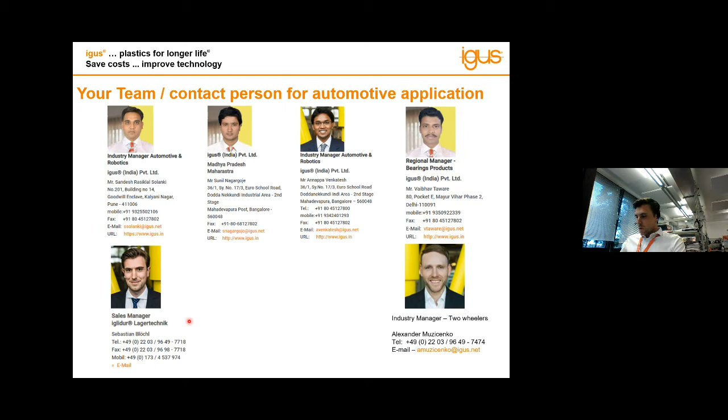So we can go into our agenda for today. We will start with some information about the company. What are we doing? What are our products? What kind of materials do we use? What is the secret behind the products?

Then Annappa will take over with the India presence. He will give you an overview about our production processes. He will tell you, and this is still very fascinating to me, we can provide so many different ways of samples. We can send even samples on the same day from the catalog, from the stock. We can machine samples. He will give you a lot more information about that.

And then we will go over to Alex. He will start with applications, cost down applications, technology improvement applications for the motorbikes, and Vaibhav will go over to especially applications for the scooter departments.

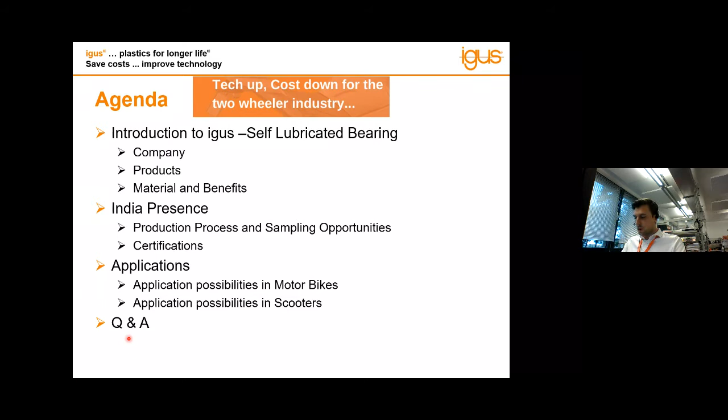Okay, coming back to the start. The company IGUS was established by this young fellow here, Mr. Günter Blase, together with his wife, Margret Blase. He started the business in his private garage, and he came up with the idea that he wanted to be the person improving solutions. He went to one of the biggest automotive suppliers, called Pierburg, and asked them directly: do you have any part you have issues with, some problems with? I want to solve it for you. They gave him this part directly. It was a metal part in the past, and they struggled with a short lifetime, and the part price was kind of high, so they had to replace it often, even with higher costs.

He invested in the first injection molding machine and engineered on it, and finally found a way to produce this part by injection molding out of engineering plastic. He reached exactly the topic from today, and still this is what we are following: improve the technology. He reached a much longer lifetime than the existing product, and on the other hand the part price, because of the injection molding process, was reduced.

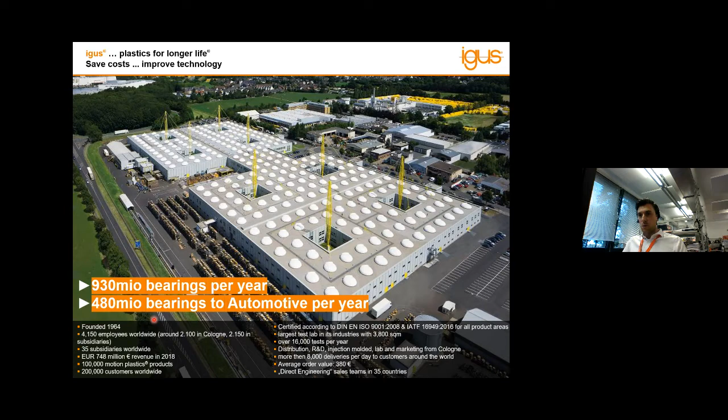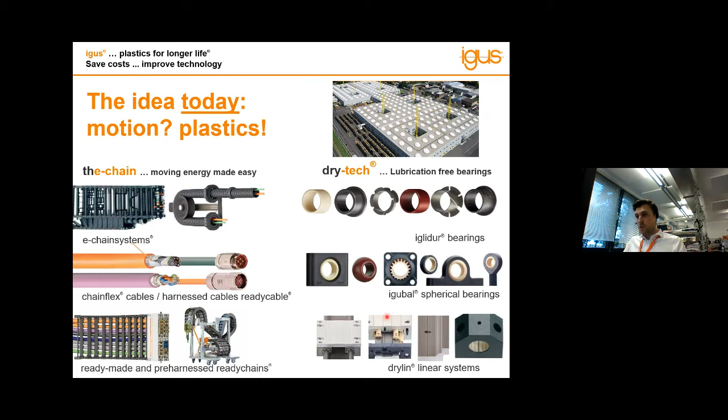Okay, let's go to the topic of material. Let's talk about our secret: what are we using? We are actually a material developing company. We call our materials tribopolymers. There's a reason for it: it's tribology, meaning we invest into material. We create materials which are being used in motions. This is what we do. We don't produce parts like laptop cases, screen cases, or box cases - we always focus on applications and products which are in motion. For that, we have to spend a lot of energy and effort into engineering new materials each year. We are creating around 500 new composite materials each year.

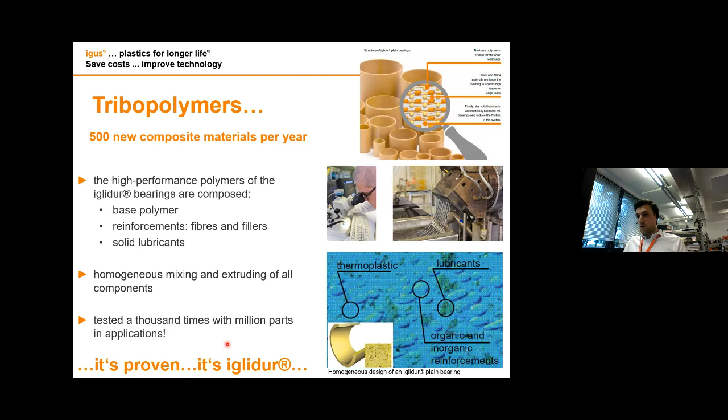Okay, already mentioned some benefits. So dry lubricants inside, that means we are lubrication free. You don't need any grease at all in your application. We are reaching very low wear rates, good coefficients of friction, to name these benefits. On the other hand, it's a plastic part, so we don't have any corrosion issues. You can use us in water contact related applications wherever you want.

We have a bunch of materials for pretty high loads, for very high shock loads, edge loads. Annappa will also give you information on why they are very good for edge loads. We will go over materials with up to over 250 degree temperature, so you are able to use them, and we are already selling millions of parts into gearbox areas, like over 250 degree constant temperature, possible with Iglidur, with engineered plastic from our side.

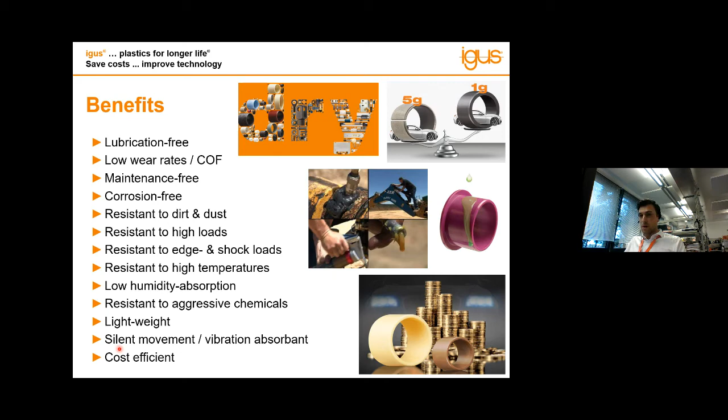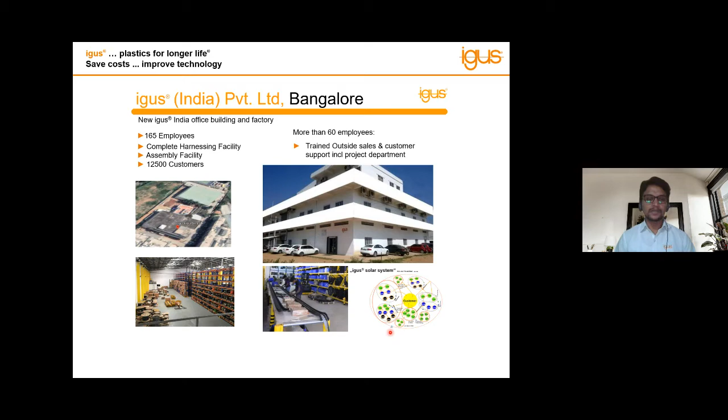So moving further, we will discuss the production processes or production technologies that we follow in the IGUS factory in Cologne. The first one, which is the core of our production process, is injection molding. When I'm speaking about injection molding, even the tool constructions happen in-house, so all our engineers work on the tool and we don't depend on any third party. Also all the materials required, as Sebastian explained, all the patented materials, different materials, are developed inside IGUS. The second process we are speaking about here is extrusion.

So in this extrusion, apart from standard catalog dimensions that are being injection molded, here we can produce round bar stocks and plates, which can be easily machinable. I will speak more about this in the next coming slides when we are speaking about the prototypes.

3D print technology, as everybody knows, is a new and evolving thing happening in the industry. We can definitely support you with 3D printed plastic molds or 3D printed aluminum molds, where we can bring down the setup cost that happens in injection molding. I'll cover this in detail in the next slides.

3D printing machines are also being used in our facility for sample support, like FDM, filament deposition, and SLS are also followed in IGUS facility. A few of the other, as I said earlier, semi-automatic assemblies and flexible assembly lines are being followed for cable management systems, and a few dry-lin systems also, like for automation, where we can assemble these things in the factory itself.

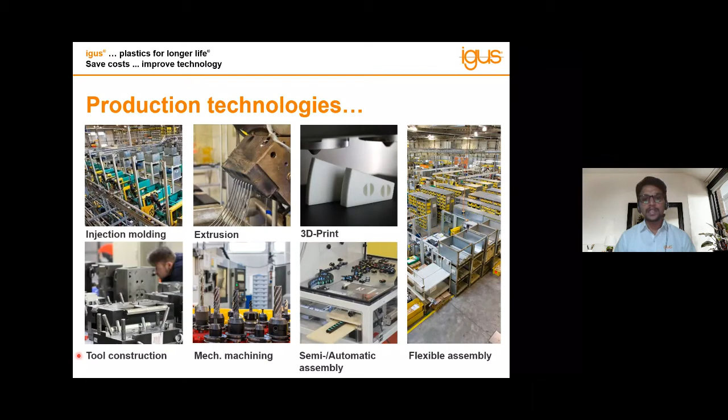So what are the various steps that we follow here? As I said earlier, injection molding is the main important production process that we follow. I'd like to bring in the point of catalog here, because we have close to more than 6,500 articles of one material in catalog. You can just imagine the huge dimensions available in our catalog in different materials and different sizes.

Just to give you an example, starting from sizes of ID of a plain bearing, starting from 1 ID up to 150 ID, and also with different thicknesses, different lengths, different collar lengths. This is one of the main USPs of the IGUS catalog, that you can directly choose the parts without even worrying about any kind of setup cost.

And in the second process, machining, if you are not finding that standard catalog part or dimension in our catalog, you can go for machining, where the round bar stocks that we extrude, or the plates, are easily machinable. We can supply you the complete finished part if you give us a drawing, or even the complete bar can be given to our customer so he can machine it himself. This is another step you can follow for prototyping.

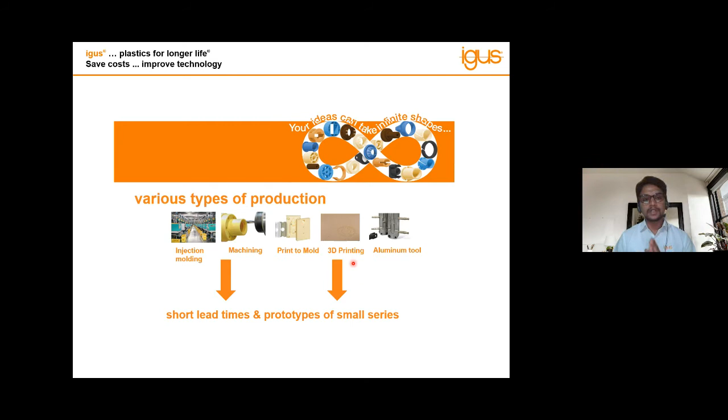For the fourth drawing, what you're seeing is 3D printing. As I said earlier, we also have 3D printing machines where we can give you immediate sample support with filament deposition, and we also have special materials like i3 which are extremely wear resistant, and we follow production processes like sintered SLS or sintered laser compacting process. These are a few of the prototype production processes we follow to support all our customers in their initial days of development.

So moving further, what can you replace with IGUS? You can see in the drawing, in the picture, you can replace bronze, you can replace bimetal, you can replace needle roller, PTFE coated backed metal bearings, bimetal bearings, and so on.

So what are the benefits? As Sebastian already explained, there are many USPs. The prime one being, you can see in the pictorial drawings, you can completely avoid rusting and corrosion. No lubrication is another USP, and weight, you can save weight by a ratio of 7 times when compared to metal bearing. And case by case, you can also save a cost of 40% when changing from conventional bearing to iglidur solutions.

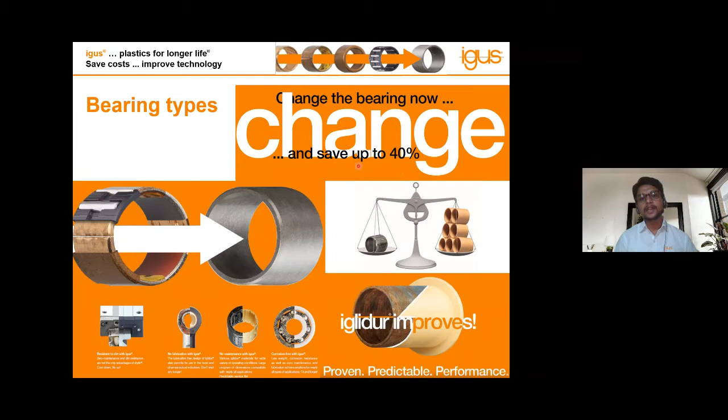Here I would like to do a quick case study with one of the very commonly used parts, which is PTFE or Teflon coated metal rolled bearing. You can see the composition of this PTFE metal bearing: a thin layer of around 50 micron of Teflon or PTFE, backed by bronze and steel, which are metal. In the next slide I will explain in detail what happens.

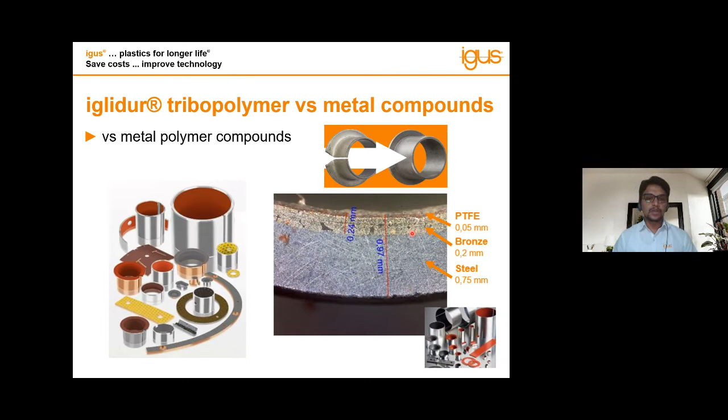Just to give a brief introduction, in the first picture what you're seeing is the PTFE coated metal rolled bearing. The PTFE layer is gone after a few operations, say a few thousand cycles, and you can see directly the metal is now running metal to metal, like the shaft running directly on the metal.

So here the coefficient of friction, what it was before when the Teflon was there, and what has happened after the Teflon has gone, you can see the result is very catastrophic. The shaft can get scored and damaged. The friction has increased maybe 10 times more.

But in the second picture, with iglidur or IGUS bearing, you can see, as Sebastian explained, the solid lubricants are evenly distributed throughout the thickness of the part. These parts are homogeneous in composition, so the property relevant to coefficient of friction is uniform throughout the thickness, and the shafts are completely safe, 100% safe, because of the solid lubricants present, with no scoring marks on the shaft. This can save a huge amount of cost at replacement time, or in applications like suspensions or any kind of pedals and levers where you use this kind of bearing, saving a lot of cost.

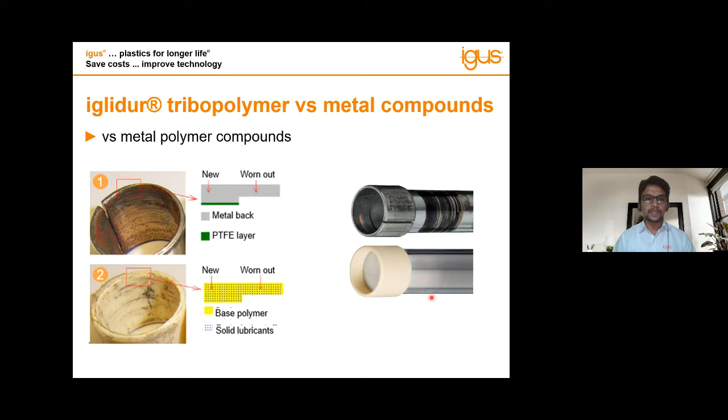Moving further to the core of the IGUS factory, that is the IGUS test lab, which covers almost 3,800 square meters, almost half the size of a football stadium. Here all the parts that were developed are being tested, where we conduct more than 16,000 tests per year, and out of that, 12,000 tribo tests are performed on iglidur bearings.

We perform different tests like rotation, pivoting, linear, and combinations of these, like linear with pivoting, linear with rotary applications. We also introduce many different parameters like high temperatures, negative temperatures, dirt or foreign particles, lubrication effects, and different loads and shaft combinations.

All this data is fed into our expert system, where you can calculate the life of each bearing by giving data like load, cycle count, temperature, and shaft material used, and predict the life exactly, even before starting your application. For example, a part can wear by 50 microns after 2 million cycles with a load of 5 MPa. This is what IGUS is expert in, we can predict the life of the bearing before you even start your application.

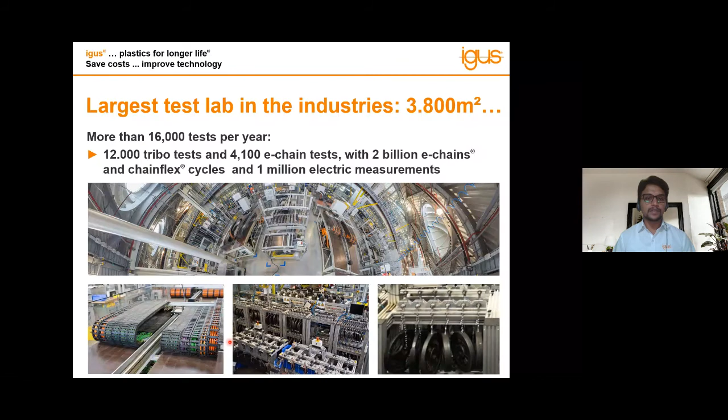For the last slide, I would like to give a brief introduction to quality management and the certificates that IGUS is equipped with.

The first two you're seeing are quality certificates that IGUS follows. We are equipped with ISO 9001:2008, IATF, and material certificates very much required in automotive, especially for export markets where ROHS is compulsory, along with cleanliness and fogging requirements for plastics. When speaking about polymer parts, fogging and burning rate are very important and critical. All these latest certificates are available with IGUS for your support.

And for our automotive customers requiring very critical applications, where they don't want any kind of burrs or molding defects, and want 100% quality controlled parts.

So we can run an optical control system where the parts go through this optical sorting machine, where many cameras are critically looking for any kind of molding defects or burrs that are present, and they're directly kicked out of the system. Whatever parts reach our customers will be 100% defect free.

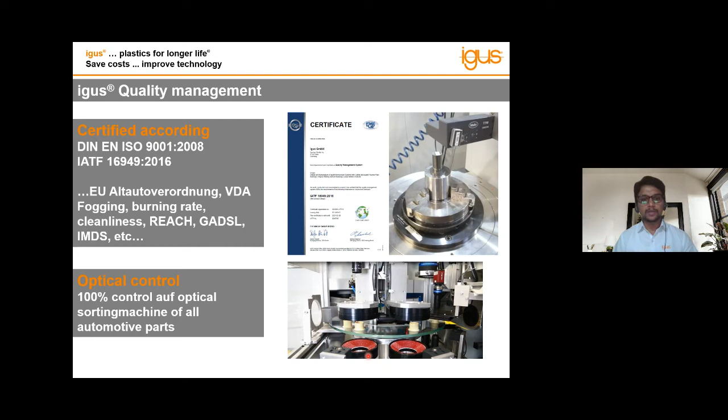So this was a brief introduction to the production process and a few other things which I mentioned. From now, I would like to hand it over to Alex, who will take you through different applications that we're doing in motorcycles. Thank you very much.

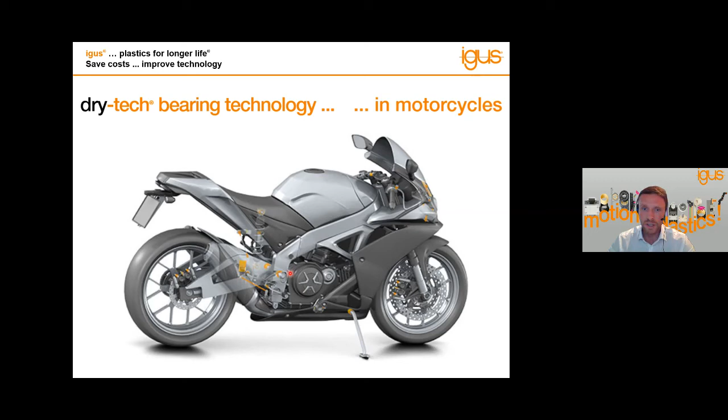On this slide, you can see the swing arm application, the orange parts. This application has high frequency as well as high load and high environmental impacts. igus bearings are perfect for this application as they are resistant to higher loads, to dirt and dust, and have low wear rates in combination with dry running.

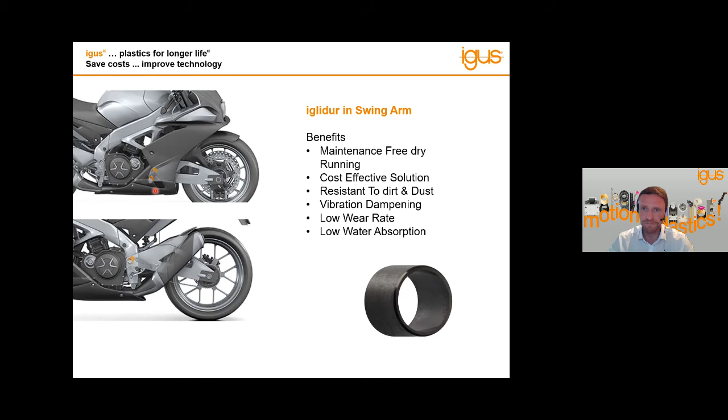Next application is the throttle valve. For this part, it's very important that the bearings are resistant to fuel and have a low moisture absorption, which igus bearings fulfill. Additionally, there's a low clearance possible, and the bearings do not need to be lubricated.

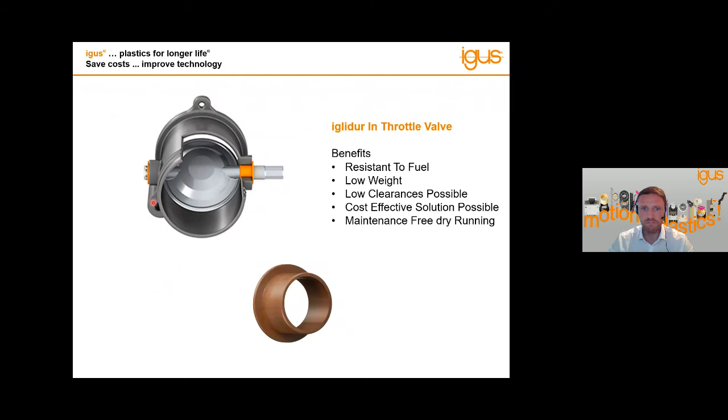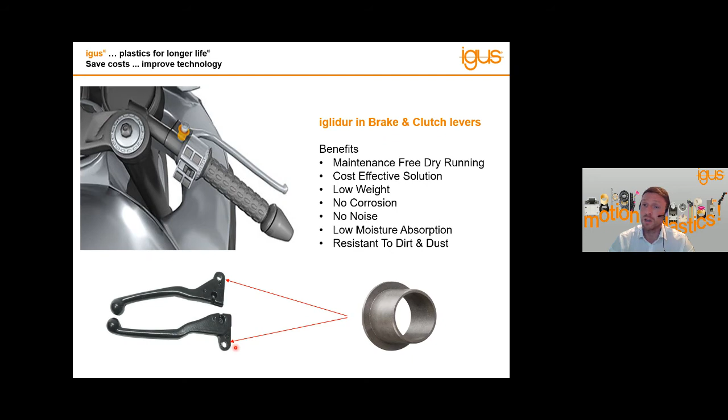One of the most common applications for igus bearings are the brake and clutch levers. We have provided this application for many customers already, and this is a typical application for tech up, cost down, meaning improving the technology and reducing costs. The benefits here are that no greases are needed, there's no corrosion, low moisture absorption, and these benefits also allow a low clearance, which is very important for this application.

On this slide you can see the stand application. The requirements here are resistance to higher loads and to dirt and dust, also because of the location under the bike body. igus plain bearings fulfill these requirements, and moreover they are dry running, resistant to corrosion, and cost effective.

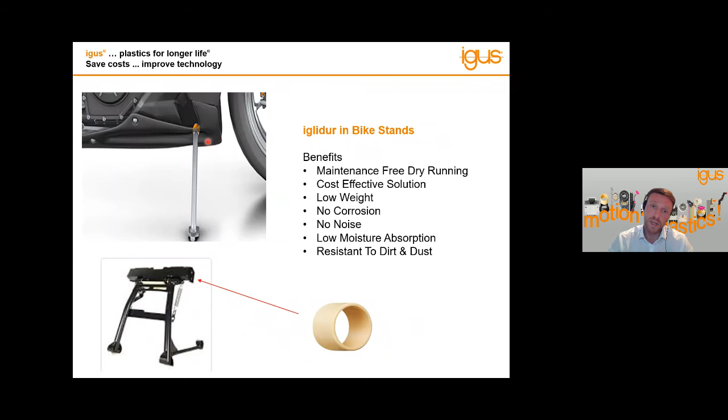Next applications are for the foot mechanism. Here we are providing igubal linkage, shown on the top of the slide, and also bearing for the brake lever at the bottom. igubal linkage is easy to assemble, and we can offer it as a complete package or as single parts. Additionally, the bearings have low weight, which is also very important for the bike industry, and are resistant to higher loads as well as dirt and dust. There's also no lubrication needed, and it's resistant to corrosion.

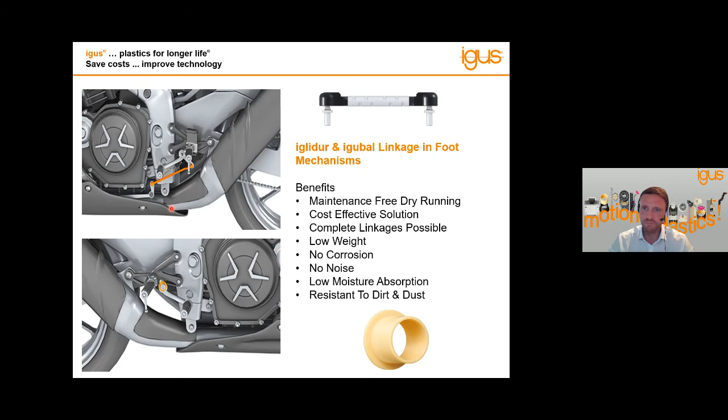For brake calipers, igus bearings are also very suitable. The best benefits are dry running and resistance to the high temperature coming from the friction of the brakes.

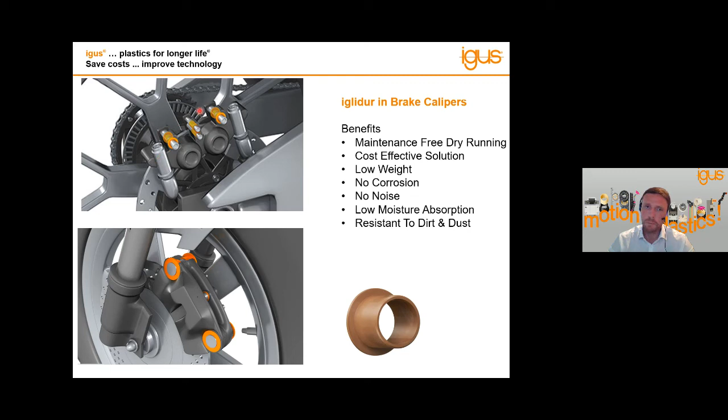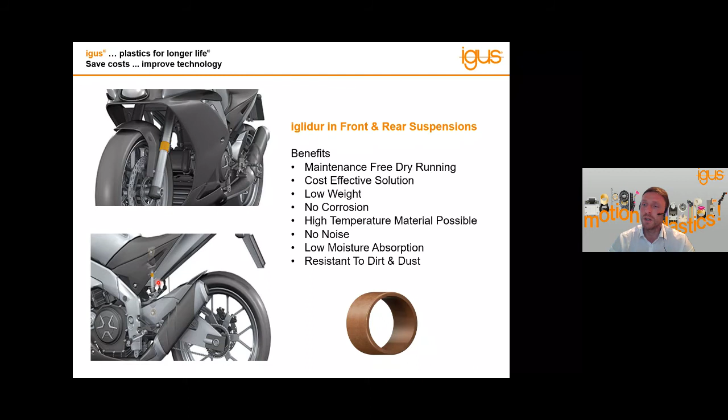Next application is the front and rear suspension. For this application, igus bearings show a lot of benefits. The most important are that the plastic bearings are resistant to edge loads and avoid scratches or damage on the shaft. Also, the function of sealing by the bearing remains. The plastic bearings are also resistant to high temperature, to fluids and dirt. Additionally, with plastic bearings you don't get a stick slip effect in this application, which is very important, and the movement of the suspension is very smooth.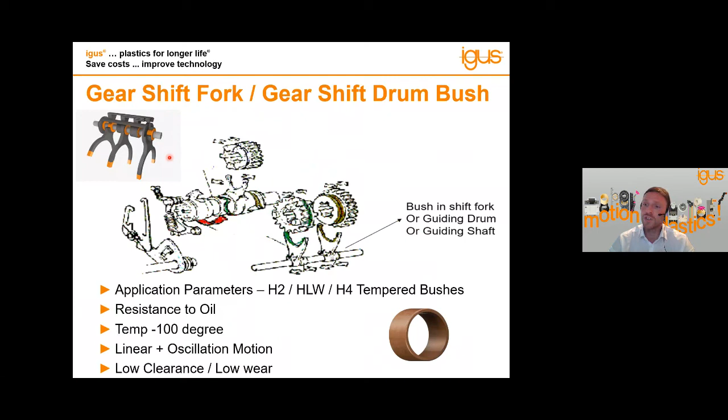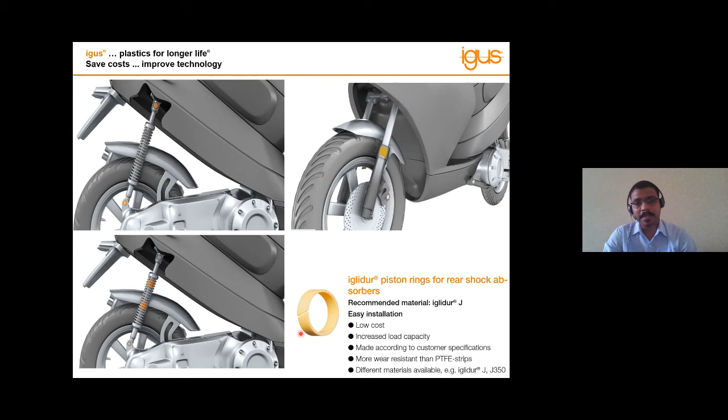In earlier slides by Alex for motorbikes, we already saw the front fork and rear fork applications for guide bush. Here I'll take you through a new application possibility for the slide bush in the form of a piston ring. The conventional solution for the piston ring can be a stamped PTFE strip, but why go for a complex solution? We have an easy solution: an injection molded piston ring, which is very easy from an installation point of view and can offer very high wear resistance compared with PTFE strips. We also have a few other materials which can be used for the piston ring.

Moving on to the next application, inside automatic gearboxes, CVT - continuously variable transmission. Here, as you can see in the image, a pulley or roller with taper. This part can be developed with igus iglidur material, which has temperature resistance up to 180 degrees Celsius. This material is also very well suited for rotating movements, offering higher wear resistance for rotating movements, as well as a very low coefficient of friction on steel shafts.

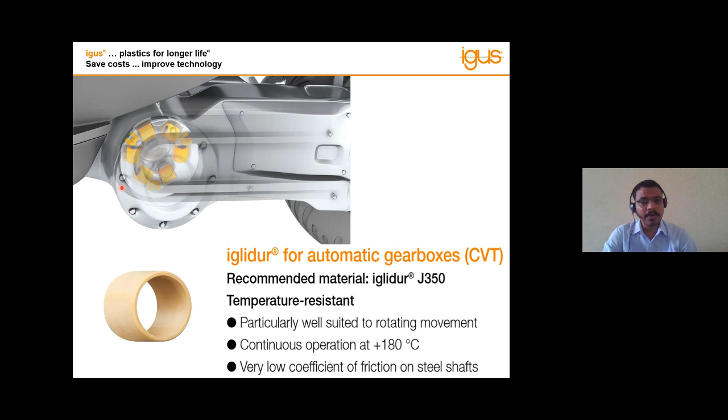Iglidur for rear wheel swing arm application. As we know, this is a high frequency application where huge loads can come into the system, so we need material that can offer edge load resistance. Here we have Iglidur P210 material, which offers really good edge pressure resistance. This material is also very versatile, giving similar performance on almost all different types of shafts, plus good wear resistance at such high frequency, high load applications.

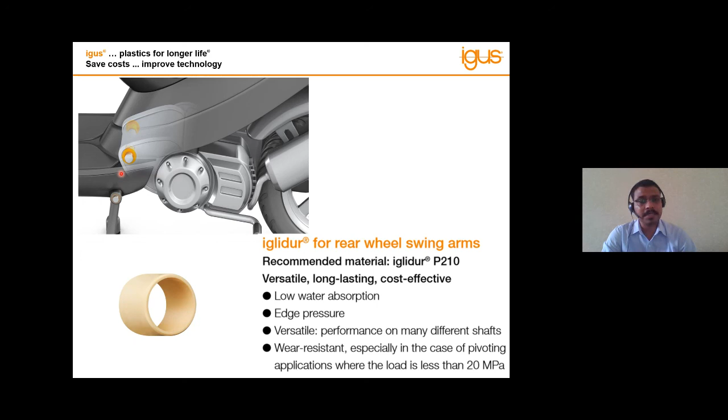Moving on to the next application, Iglidur bearings in water pumps and fuel pumps. In future generation vehicles like off-road bikes or mountain bikes, we see water-cooled engines, which need water pumps to pump water for cooling purposes. We have a solution inside water pumps as well. There is hydrodynamic lubrication because of the media coming into contact, which is a water and glycol mixture. The conventional solutions are ceramic bushes or carbon graphite bearings. We have the Iglidur H family material, which offers benefits against conventional solutions - it is suitable for overmolding, offers cost reduction, noise reduction, and most importantly, cost savings against these conventional solutions.